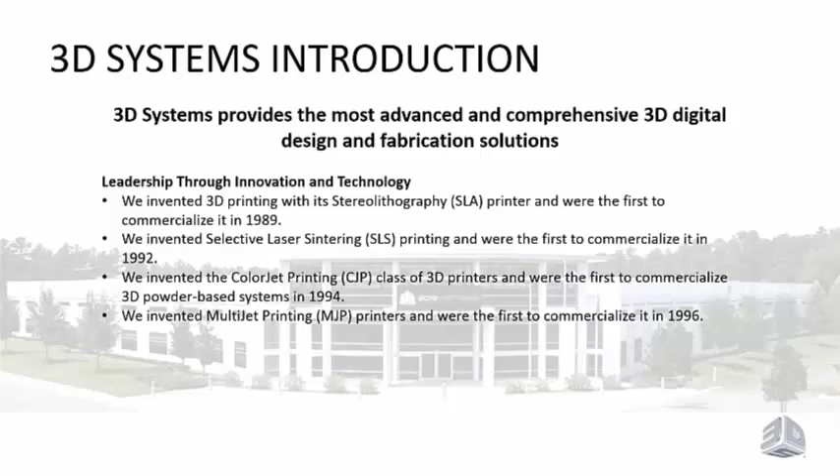Let me start with a quick introduction to who 3D Systems is. We're the company that makes the 3D printer and the materials that Bi-Link is using in this particular example. We're known for providing the most advanced and comprehensive 3D digital design and fabrication solutions, and we're really proud of our leadership through innovation and technology. 3D Systems invented 3D printing with stereolithography, invented in 1983 and first commercialized in 1989 by our founder, Chuck Hull. We also invented selective laser sintering, more popularly known as SLS printing, and were first to commercialize it in 1992. We invented the color jet printing process and commercialized that in 1994. And we invented multi-jet printing, which is the technology behind the ProJet 3500 that we'll be talking about today.

3D Systems is unique in that we provide by far the broadest array of 3D printing solutions available on the market. Everything from printers that sit in your living room or your garage, in children's classrooms, all the way through to your office and onto the factory floor. We have systems that cost less than $1,000 all the way up to more than $1 million, and of course a broad array of materials you can print in, with different accuracies, speeds, color or no color, single material or multi-material. There's a vast array of different options that we offer in a variety of different printers.

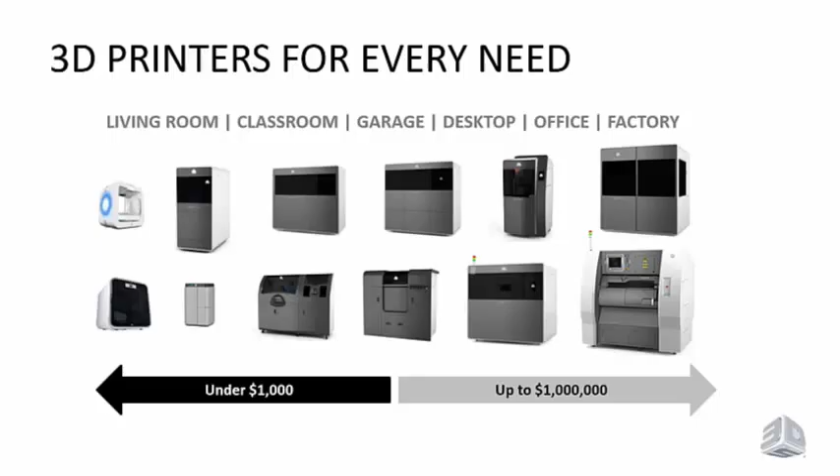As we look at how companies are using 3D printing today, particularly in the manufacturing realm, we can group the different types of applications into 5 broad categories. Starting from the left, the earliest part of the product development process is really all about printing models for communication purposes. These are 3D printed parts where there's an emphasis on the aesthetics and appearance of the parts, and it's all about communicating your ideas. We all know it's much better to hand a prospective customer or decision maker inside your company a model they can hold in their hand and look at and really understand a product idea, rather than looking on a screen or at something on a piece of paper. That's what communication models are all about.

The next step in the phase is prototyping. This is really about functional prototyping or validating various engineering ideas. Here you want prints that are precise, that can approximate the function, fit, and form of the product you're designing, so you can test and validate your ideas.

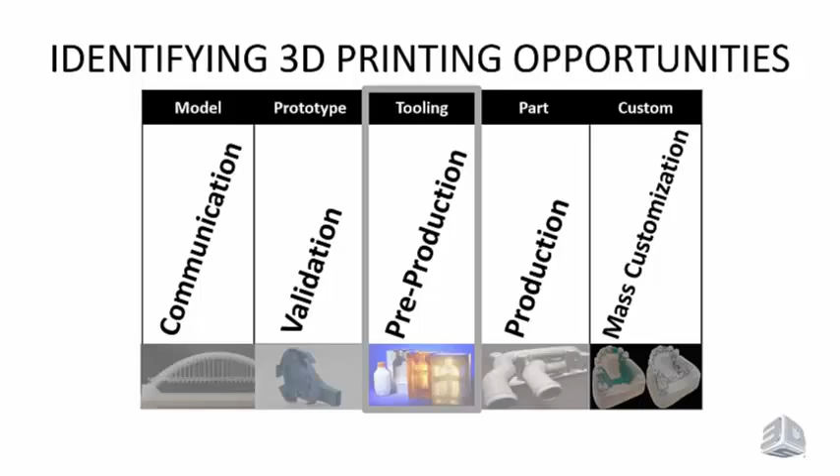3D printers can also make direct end-use parts. We can make parts in metal, a variety of different plastics. We can even make parts not for manufacturing, but more for fun, in food—there are edible 3D printers, and 3D Systems is coming out with a printer for edibles in the not-too-distant future. And the last broad category really ties back to healthcare, but some other areas as well, and that is mass customization. The idea here is you can print millions of individual parts, and there's no additional cost associated with having every single part you create be slightly different. This is a huge advantage of 3D printing.

Okay, with that, I'm going to hand it over to Ray, and he's going to talk to you a little bit about who Bi-Link is, why they're using 3D printing, and what they've been doing with the ProJet 3500.

Thank you, Tom. Good morning, good afternoon, everyone. We appreciate this opportunity. About Bi-Link, what we do: we're a high-volume manufacturer of complex metal and plastic components and electromechanical assemblies. If you think about products or sub-assemblies that are about the size of a laptop computer and smaller—stamping through 600 tons, injection molding through 500 tons, and vertical insert molding through about 350 tons.

So that gives you a sense of what we do. We're an international player, with factories in the U.S., Mexico, and China. So why are we so interested in prototypes and pre-production?

Well, here it is in a nutshell. We've been doing this for 53 years across demanding industries for the very best and biggest OEMs around the world. The lesson we've learned early is that the projects that launch the best, run the best, and have the best economics are the ones we're able to get involved in early. We need to be able to influence a design to improve manufacturability.

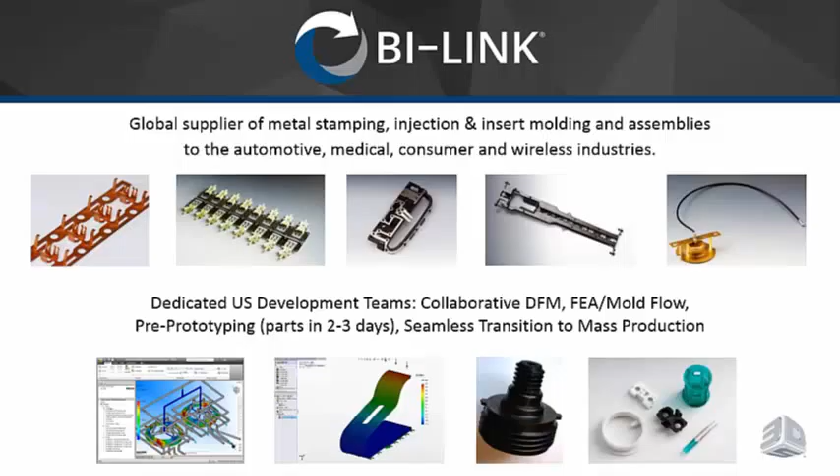High volume metal and plastic manufacturing is tooling intensive. It still is, and we're experts in tooling, and that matters. Our biggest impact happens when we engage engineer to engineer.

This year, we rolled out the Hardware Store by Bi-Link. It's a place for engineers, by engineers, to collaborate with our technical staff and get access to our technology and resources. It's a place to test, talk, tinker.

What we intend it to be is an extension of your model shop with a whole bunch of global manufacturing horsepower backing it up. Part of what we do in these spaces—we have one in Raleigh, North Carolina, and we've got one opening in San Diego very shortly—is host events for our customers.

We want it to be a place, an extension of our customers, of their model shop. We want our clients to be able to come in and attend events. The Midnight Lunch Lab that we referenced is really a nod to Thomas Edison.

From our perspective, he's a master at bringing together teams of people with diverse backgrounds to define and solve really big, important, worthwhile problems. We look at this space as somewhere where we can work with our clients, engineer to engineer, to solve important problems.

The opportunity, as we saw it a couple of years ago, it became clear that our customers required our industry to do more, faster. Improvement needed to happen by an order of magnitude, not incrementally. The process needed to happen in days, not weeks.

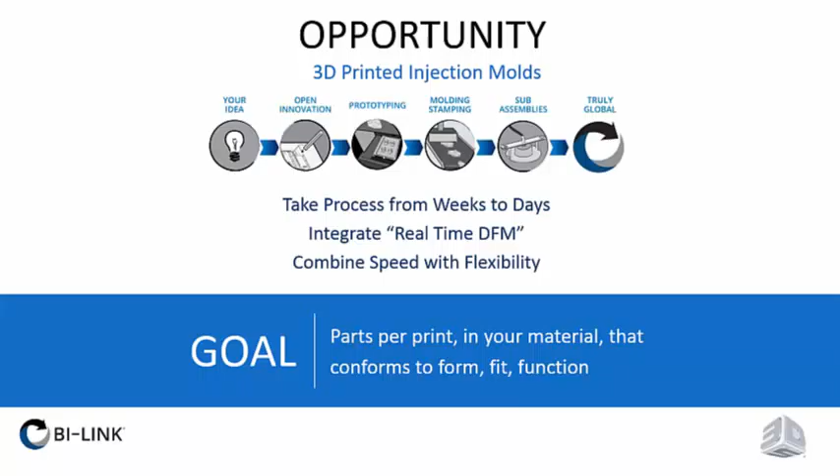DFM, design for manufacturability, needed to happen in real time at every step. Speed and flexibility were a given to accommodate changes. So the goal, as we saw it, was how can we get our customers a few parts per print in the material of choice that conforms to form, fit, and function now, not later.

So how do we get here? Tom said it earlier that with additive manufacturing, complexity is free. In our industry, tooling is complex. By extension, additive manufacturing is at least a part of the solution.

We learned that it's more than that. We did some research and saw that printed molds had been attempted, but it never really seemed to evolve. We've all seen the same video of the high-impact polystyrene spoon being molded, or the impeller, but nothing seemed to change. We placed a small initial bet.

We bought one of the $1,000 printers and just started experimenting. Bought some extra reels of PLA and started to play. We come from a long line of tinkerers, as I'm sure many of you on the call do as well.

We discovered that the additive manufacturing process had its benefits, had its quirks, had its limitations. We continued to research processes and materials, and ultimately chose our next platform to be the 3D Systems ProJet 3500 HD Max to begin our testing and experimentation for printed injection mold tooling.

And we learned some interesting things, contrary to what we thought going in. Number one, printed molds can take the heat. It's not something relegated just to polyolefin type materials, lower temperature thermoplastics. Compression is your friend—the materials are compression friendly, and that's not a problem.

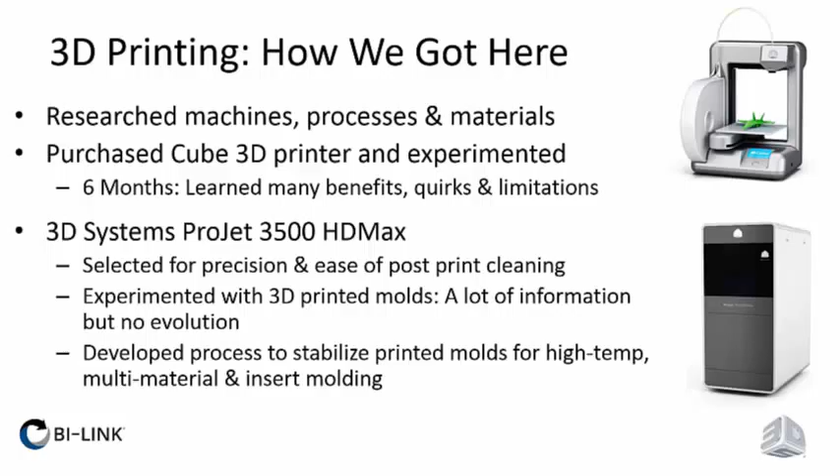And now I'll turn it over to Frank to share with you some of the examples and applications we've done. Yeah, we have a few examples. This is Frank, our R&D director. Some of the parts we've done, what you could see with ours is we're doing basically any material that we shoot in production, we're running through these printed molds.

This is an example of a part we did with LCP. We injected at 650 degrees into a printed plastic mold, and you can see that part's pretty long. It had some thin sections in it. Down on the tail, the thickness was down in the 0.6 millimeter range, so it took a lot of pressure to fill that part, 6 inches long.

You could see where we injected, and it wasn't a problem. Most of what we're doing is pre-production validation testing, so most of our orders tend to be 10 to 20 pieces. They're not real high, so these were a perfect solution. We get parts that are exactly to print. These went into medical assemblies used for validation testing. They weren't just visual samples, they actually work and help verify print tolerances. We could do core pins, undercuts, slots. It's been very helpful to us. We've been doing it now about 2 years.

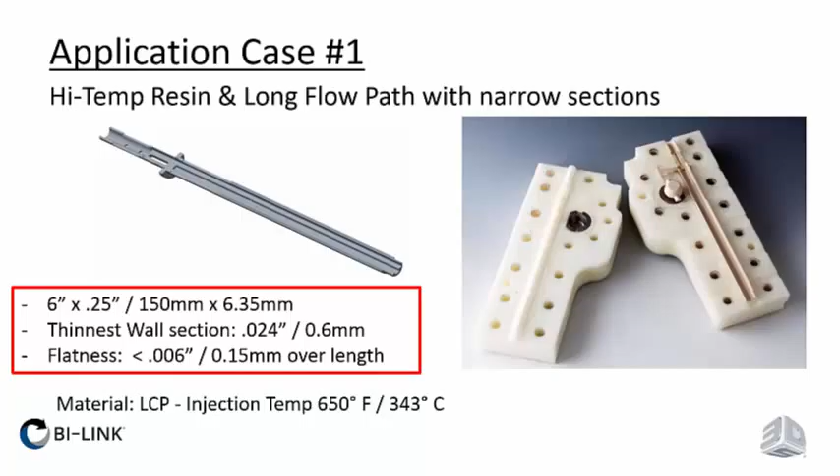This next part kind of highlighted how quickly things could evolve when you're using these machines. This was an actual part we did for a customer, a cover that goes into a housing. Their normal cycle time for a part like this, using TPE, their normal turn was in the 2 to 3 week range for prototype tooling.

We did 4 spins on this part in 6 days, including FedEx to the customer. They would send me parts in the afternoon, we'd design a mold, print it overnight, mold parts in the morning, and ship them again. So what it did was take their development time that would have been in the 3-month range and bring it down to a week, and this was actual parts. They functioned. We ran each turn at 25 to 50 parts, so it was a perfect answer.

It's hard to see in the pictures, but one of the advantages you get with the 3D molds is sometimes you could actually create features in these molds that would be impossible to machine. You could actually print underneath the surface of the mold, especially with these elastomers. So you could twist the part to come out, but instead of having to put slides in there, we were able to print hollow areas and inject into them.

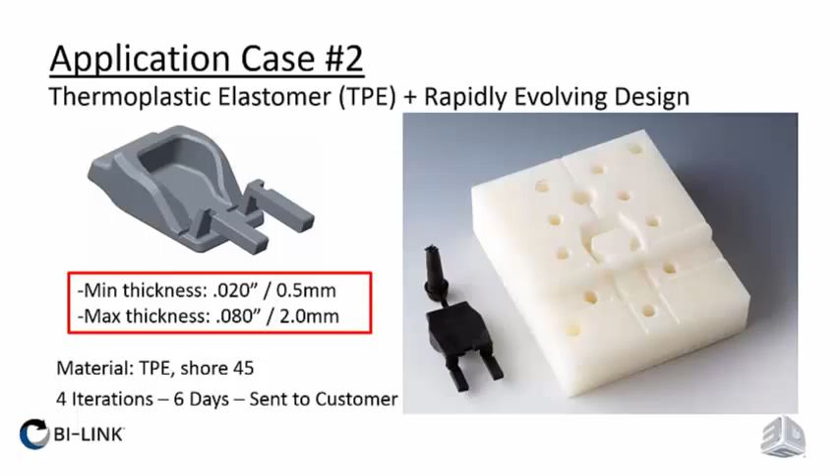This is an example of one of the insert molded parts we did. The little contacts were 0.15 thick. It was an actual part that was going to go into production, but for pre-production samples, you can see here, to make the mold with the gauging in it for the metal inserts and everything was about a day. So it took the lead time from what would have traditionally been about 2 to 3 days - we could ship parts in 1 or 2 days.

And that located the inserts. The part was actually the same exact material, same exact size, same exact construction as what they were going to use in production, but we could turn it in a matter of days.

We didn't do a real high number. You could see how tall some of those features were that had to go down inside the mold, but we got 25, 50 parts out of it, which for a prototype order was more than enough. None of these molds tend to be very high volume. It's not what we're using it for. If we get an order for 1,000 pieces or something, we'll go into a different kind of mold.

These are intended for very quick turn pre-production parts that need to be right on the button. They're print tolerance, they're the proper material. You just can't use a printed sample because of the properties of the material. We get the accuracy on the printed samples, but you don't get the same characteristics in the material.

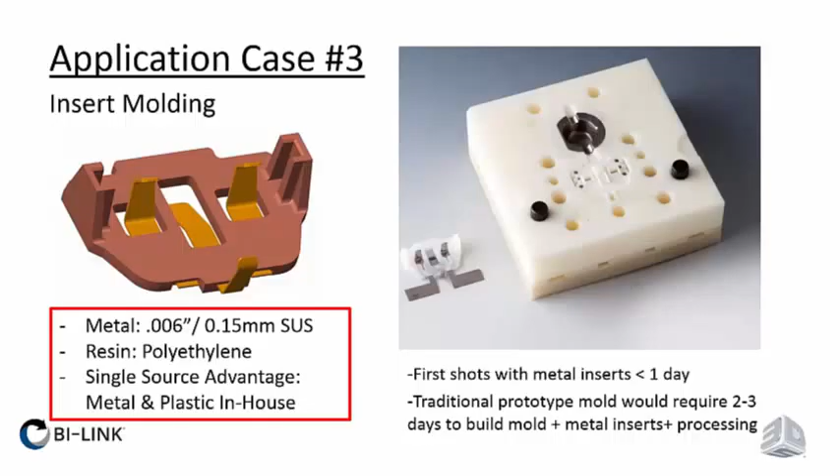That's where these shine. Let me tell you a little bit about the ProJet 3500 series plastic printers. As we've been talking about, Bi-Link is using the ProJet 3500 HDMax, which is the top end of the 3500 series. There are several printers available, but these printers are all about printing functional plastic parts in high definition right in your office environment.

The underlying technology used in this printer to print is called multi-jet printing, or MJP for short. MJP really makes beautiful functional parts in a variety of different materials. And you can see, as we know, these parts are tough.

They're tough enough for printed injection molds. They're also tough enough to be hydroforming molds, and you can see in the upper left-hand corner the underlying mold, and a formed piece of sheet metal that has been hydroformed over that mold. So very high pressure resistance, very high impact resistance on these materials.

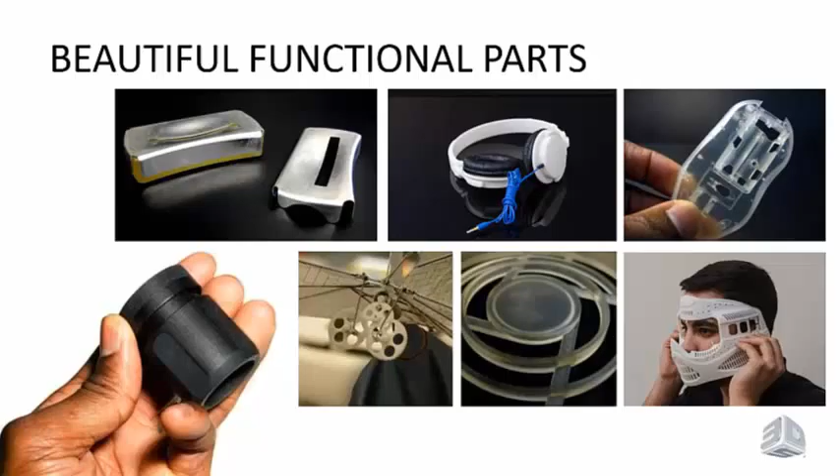There's white ABS plastic-like materials that approximate ABS plastic. There's clear materials, black materials, and several others, and I'm going to touch on those a little later on.

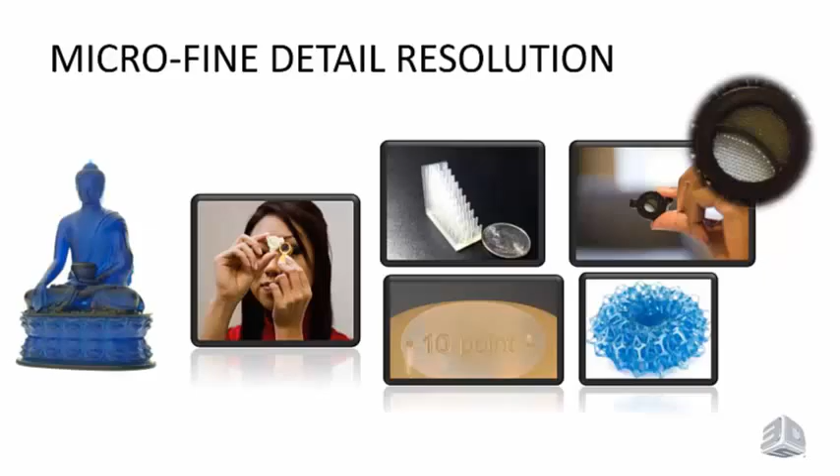Again, the ProJet 3500 is all about having very, very fine detail resolution. You can see some of these parts here as small as a US dime, the level of detail that you can get. This Buddha statue on the left, just to give you an idea, is just a few centimeters tall. So that's a very small part, but the detail on it is just exceptional. And the material it's printed in is beautiful, as you can see.

One of the things MJP technology from 3D Systems is particularly good at is consistently sharp edges and corners. We've taken very close-in shots of some plastic parts printed on a ProJet 3500, and you can see the very fine detail. Like a speaker grill mesh or this electrical connector, the edges on that connector are very, very sharp, very crisp. And that's not something you see in all 3D printers. Some printers, in fact, struggle with this quite a bit.

Sharp edges and corners aren't just about aesthetics. There are really big fit implications and even form and function implications to having sharp edges. You can imagine that if you print a mold, you want that parting line to seal in very tightly so that you don't get flash. This is another area where using the ProJet 3500 has a significant advantage because of the sharpness of the edges that come out of these prints.

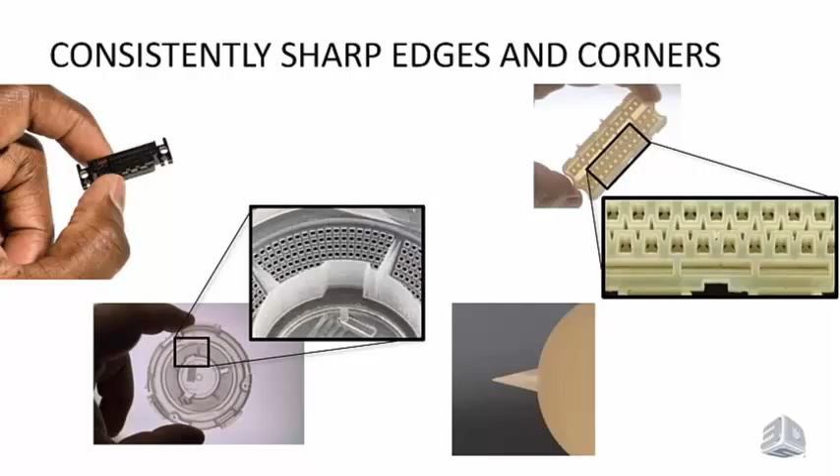It's not just about edge sharpness and surface smoothness, which are excellent from this printer. It's also about accuracy, precision, and repeatability. The prints that come off the ProJet 3500 are accurate enough for all kinds of applications, including snap fits, assembling parts together. You can mix and match printed parts with other molded parts and other formed parts, whatever they might be. You can assemble everything together for prototyping, for low-run production use.

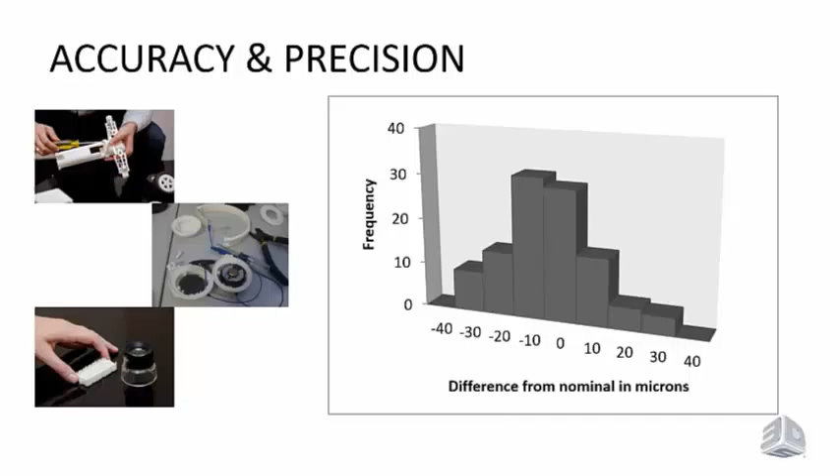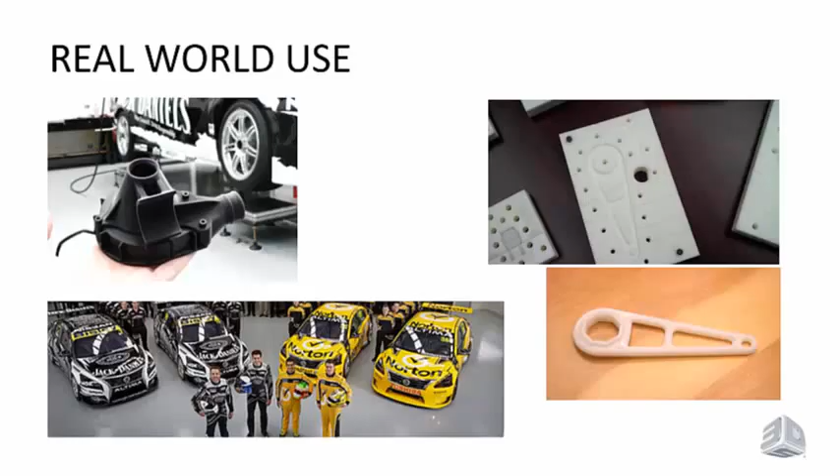I mentioned earlier that the ProJet 3500 offers a variety of different materials. I'm not going to go into a lot of detail here, but we have information on the 3D Systems website about each of these materials. Just to point out quickly, the material being used by BiLink to print molds is VisiJet M3X, which is a white material that gives an injection molded plastic look and feel if you're printing end-use parts. It's got ABS-like performance, and it's tough enough to stand up to everything Frank was describing in terms of temperature and pressure.

We have materials that are USP Class 6 capable for medical applications. We have clear materials, and we even have castable material so that you can print a sacrificial pattern on the ProJet 3500 and then cast that as a metal part in the metal of your choice.

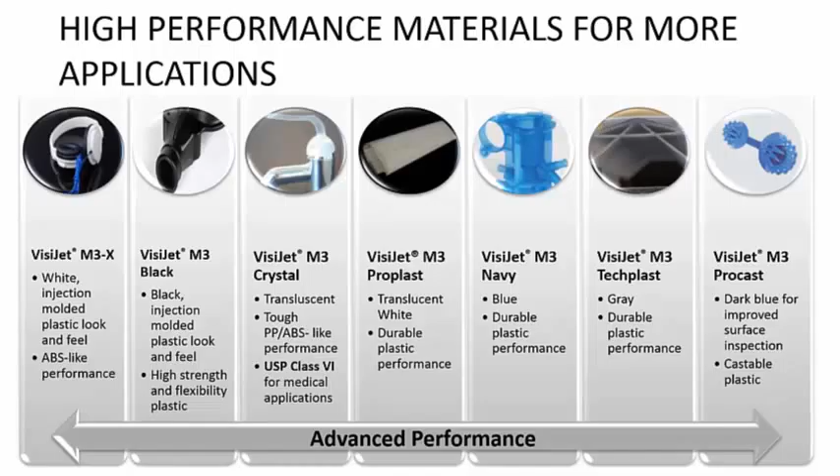Another key advantage of the ProJet 3500 is that we use melt-away wax support. All 3D printers need some sort of support structure around the part as it's being printed to hold it up, and the MJP technology from 3D Systems uses a very straightforward wax material to hold the part up as it's being printed.

So there's no caustic chemicals needed, and there's no high-pressure power washing that you need to do, which requires special hookups and can even damage the parts as you're cleaning them. Smaller features will survive and won't be broken off during post-processing, because the wax is just melting away. It's a really convenient way to get to the parts that you need very quickly.

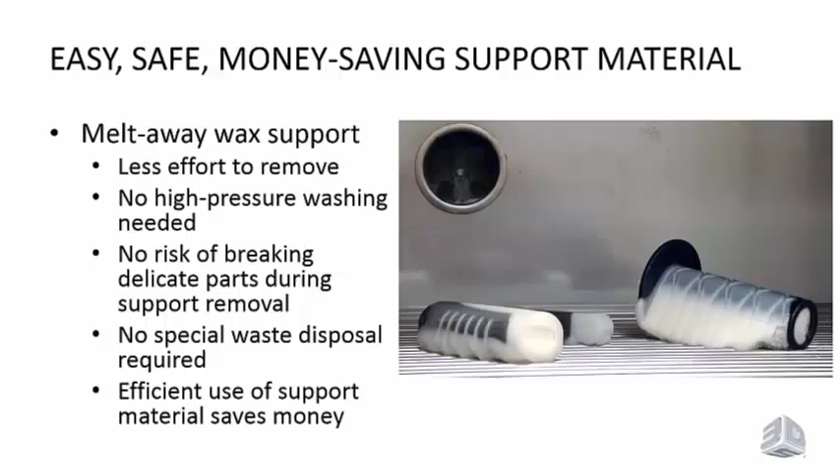Especially if you're printing more than just a few parts at a time, it's very fast to put these parts in an oven and walk away. You're not having to do anything. The wax is simply melting off while you're off doing other things. So you're not spending your time manually cleaning the parts off the ProJet 3500, which is a big advantage over some of the other technologies that are out there.

The ProJet 3500 is easy to own and easy to operate. We offer a 5-year print head warranty on the ProJet 3500, and that goes to show the durability of the print heads on this machine. They're far more durable than a lot of the other systems on the market, and we back that up with the 5-year warranty.

Project 3500s are known for their efficient material use. The support that we print in the wax material is not solid—there's actually some air in that support, so we're not using that much support material as we're printing parts. This gives you more efficient material use out of this system. And it's easy to use because you can manage and monitor prints on your iPhone, iPad, or Android phone via the free apps we make available with the printer.

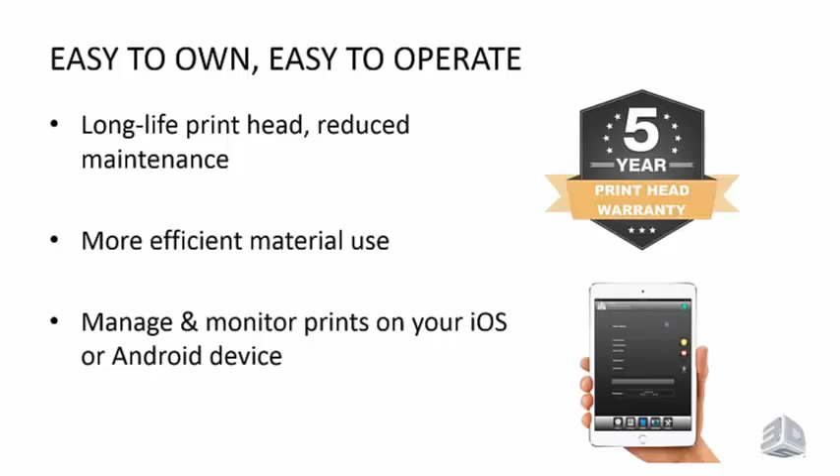So in summary, why choose the ProJet 3500? Because you get superior quality functional plastic parts quickly. They're high resolution with sharp edges, crisp details, and smooth surfaces. Again, it's not just about the look and the aesthetics—it has functional benefits as well. Parts release from molds more easily when you've got smooth surfaces. It's an intuitive, easy-to-use system that you can set up in your office, and having one of these printers means you can test more ideas faster, very economically.

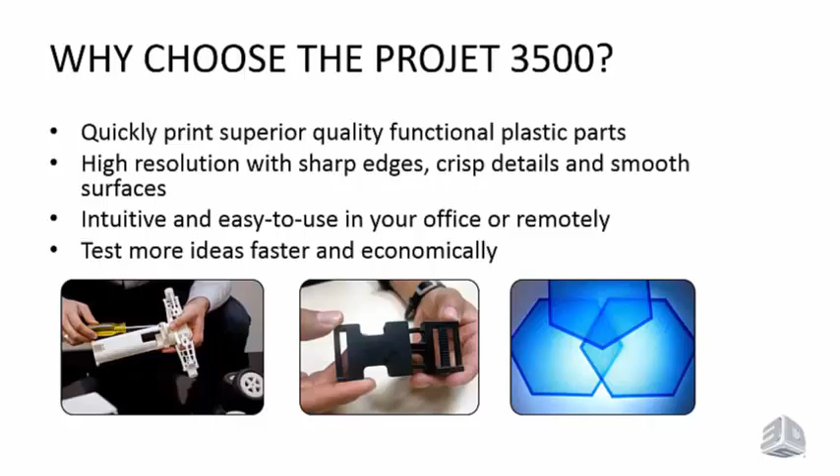All right, so let me hand it back to Ray and Frank, and they can talk about the results from the 3 example applications that we were talking about earlier.

Thanks, Tom. Just a quick summary.

The real feature to the high temperature, the LCP project that we worked on, it was part of a package of 8 plastic parts, and this particular project happened to occur in parallel with another very similar development program that was going on at our customer. About halfway into the initial project, we approached our customer and said, listen, we've got these capabilities, and we informed them about them and said, what do you think?

And the customer decided at that point, given the amount in which we were able to reduce the development cycle, they said, you know what, let's work up basically another version of the same product. The first project had been launched. We were about 6 weeks into a 16-week project, part of which required traditional metal injection mold single cavity tooling, and we were underway with that project.

Using the 3D printed tooling process, we undertook a second related project, and actually within a 4-week period went from an idea to fully developed 3D models, as well as functioning prototypes in metal and plastic, a total of about 11 parts in 4 weeks from ground zero to functioning prototypes, and actually came in ahead of the project that had launched many weeks earlier. So this really was the capstone test case for us to prove that, hey, there is something here.

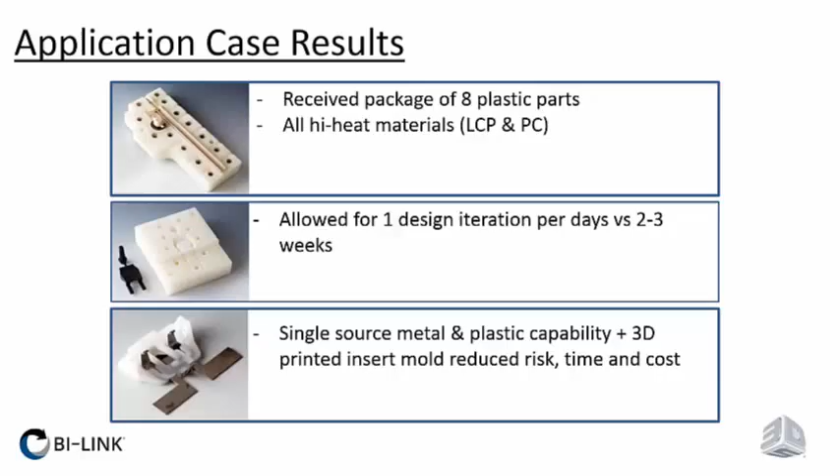So printed tooling is a game changer. It matters to our engineers. It compresses the development time dramatically, and just pulls in schedules and makes things happen faster in real-world materials. So it's been a huge benefit for our customers, and we're excited about taking it to the next level.

I just wanted to add one thing in. You were talking about the cleaning on the parts. We routinely will print models for like the injection molded parts we're doing. We will actually print the contacts into the mold at like 0.15 millimeters thick. Fairly involved, fairly large contacts, and they'll survive the cleaning, and we could bring them out and actually get a little flex on them and everything else. The cleaning on these is a huge difference. You don't damage what you printed. So you could do very fine, very delicate parts in here.

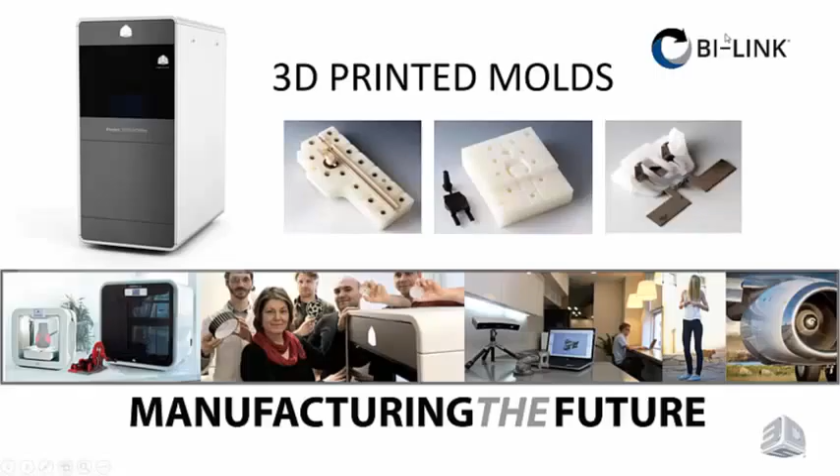Do you have experience using mold release agents to assist in part removal? Yes. We treat these pretty much the same as any other mold, all right? The way we make them is unique. The way that you inject the parts and remove the parts isn't, all right? You make compensation for these, you just produce the mold differently, and after that you pretty much treat it the same as far as clamping it, injecting it, removing the parts.

We don't use automatic ejectors or anything. We take them off by hand because usually our volumes are so low. But anything you would do with a normal mold, you do with these, and mold release is part of that.

Thank you so much. So we've gotten a couple questions on post-processing these parts. If you could go into a little detail about the post-processing of the tooling. Really, aside from we take the wax off, and we've done a couple other things. We're currently working with 3D Systems right now on formalizing the secondary steps. Basically, what the post-processing does is it gives us a little extra life.

We haven't found a part yet that we weren't able to at least get a few samples in an as-printed condition. So the good news here is that, with the machine, some knowledge of injection molding and tooling, you can produce a mold that will get you a part.